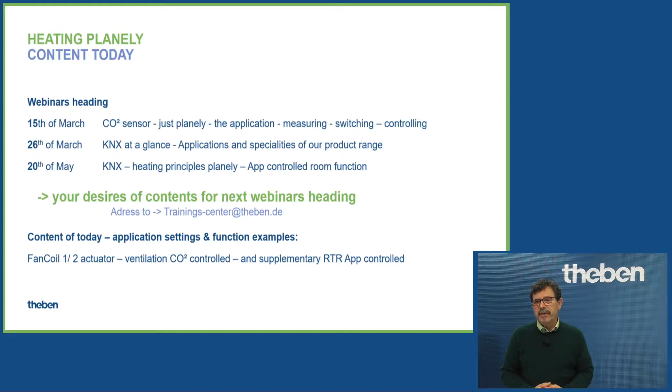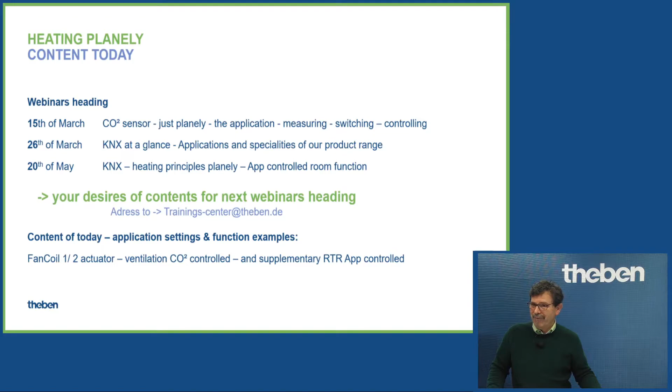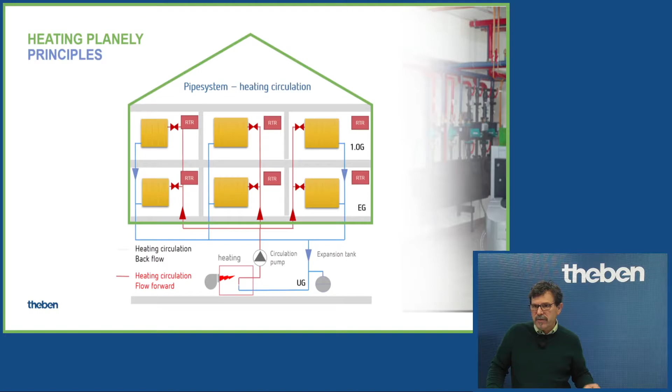Yes, so room temperature control, what has to be considered, what is, let's say, the principle, what are the basics. So just to give a really rough and a short overview. So this is a standard, let's say, heating principle system. So mostly used here in middle of Europe. In Far East, Australia and so on, the heating is not that much required, probably in some specific areas, but mostly then covered with fan coil units, so heating and cooling, for instance. But this is just a principle.

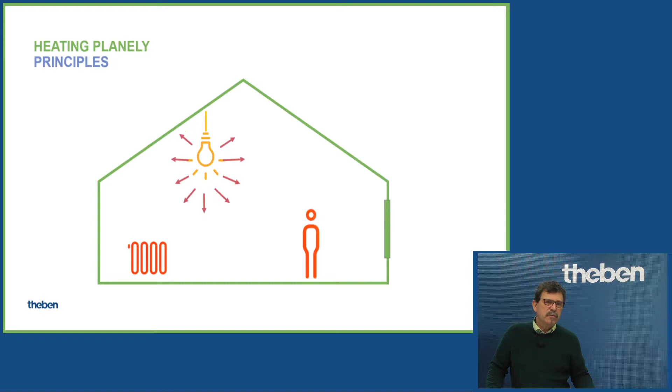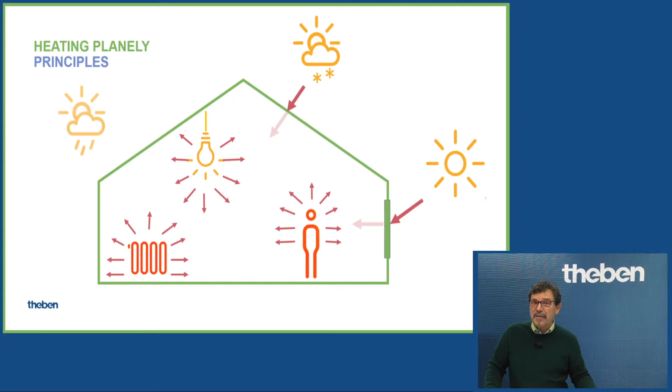But more of interest finally is how many impacts basically we do have inside of a room. So we do have here impacts of, for instance, any kind of lights which are absorbing any kind of warmth. We do have thermal radiation of heating systems, sure. We have thermal radiation of people inside of a room, and as more people are inside, we get more warmth in the room. So approximately 100 watts per hour is emitted from a human being with, let's say, standard working. If you do hard work, then probably you're giving 200, 300, 400 watts of heating energy into the room.

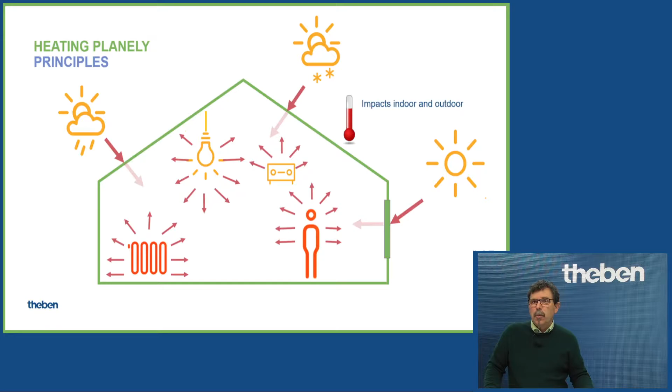And we do have some impacts from the ambient situation. So that means the weather and all these things, and technical equipment as well, which affects finally the temperature measuring. So this is a control principle finally, the RTR, the room temperature controller. So this controller is measuring what is the current temperature and gives a certain value to a valve. Depends on if we are talking about a continuous valve, or a valve which just is able to give us an I/O command to open and to close the valve, for instance, in the warm water system. And we do affect finally the radiator, so we open the radiator or we close the radiator.

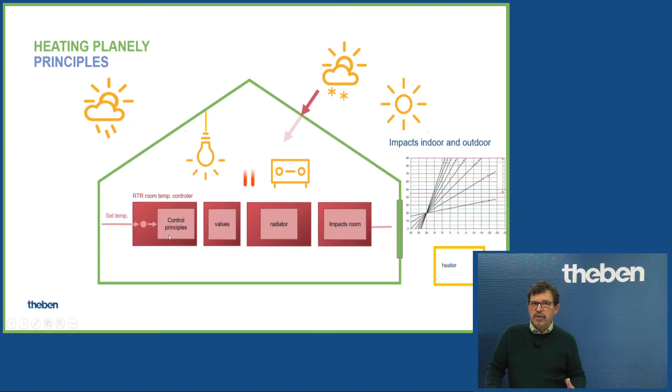And like mentioned, we do have some impacts in the room, which has a certain impact on the measured temperature. And this is, let's say, a cycle which permanently runs. So that means permanently the RTR measures how the current situation is affected by some external stuff, and finally this control value, which is sent to the valve, to the radiator, permanently adapts to the requirements.

And if you have really smart actuators, nevertheless if we talk about DIN rail or flush-mounted actuators, for instance, and if they are really as powerful as the Theben actuators are, they can give you the highest actuating value, and with this highest actuating value, we can adjust fully automatically the heating curve of an intelligent heating system without your input, without modifying anything.

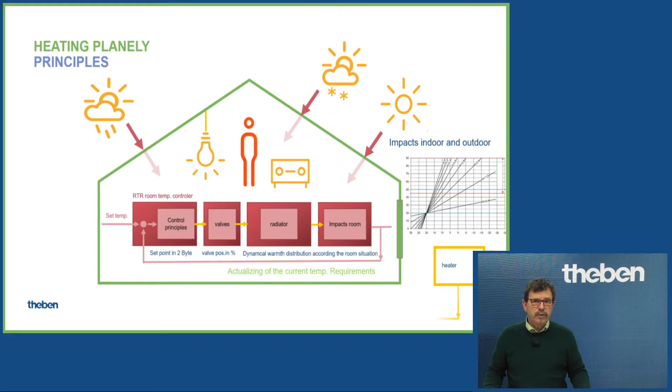So this is an automatism which runs on its own. But you need powerful actuators, which we do have. And finally, in products, it looks like that. Just as an example, we have here a room temperature controller, the iON series, for instance. We have here a motor-driven valve, which gives us a continuous response and opens, in this case, the radiator according to a specific value, so 20%, 25%, whatever is desired.

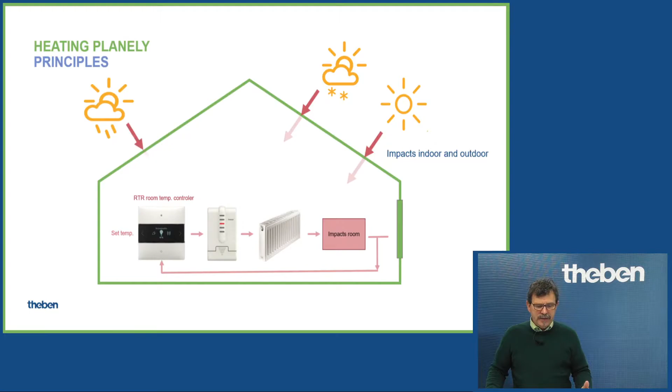And then again, the impacts, and this circle runs like that. So just to give this control function finally a face. And this is just what you need to know. And a second thing I'd like to make you acquainted with is the hydraulic adjustment. For which purpose do we need that?

Probably you discovered somewhere in your projects that one of these radiators in one room is warmer, and the other one on the other side is not that warm, but the control command to the valve is the same. And mostly this is a mistake of the hydraulic adjustment. This has to be done by the heating specialist, and it ensures that the water flow inside the heating or cooling system is identical.

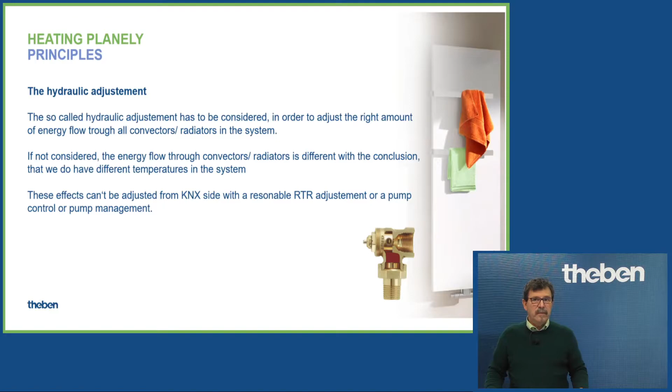So if one radiator is warmer and the other one is colder, you can't adjust that with KNX. No single controller in the world can support you in this case. Here, the heating specialist has to do this hydraulic adjustment for the heating and cooling. So let's have a look into the solution.

When we talk about heating, I just scratch a little bit. I haven't prepared any project or example, because this is another webinar which we are planning approximately in April or May, and then we concentrate especially on such kinds of solutions. So we have these heating actuators controlling two-stage valves, so thermal valves, not adjustable. And we have, for instance, here a temperature controller, the RTR, the iON. The iON is this controller here, which I currently hold in the camera. It is a room temperature controller and a monitor.

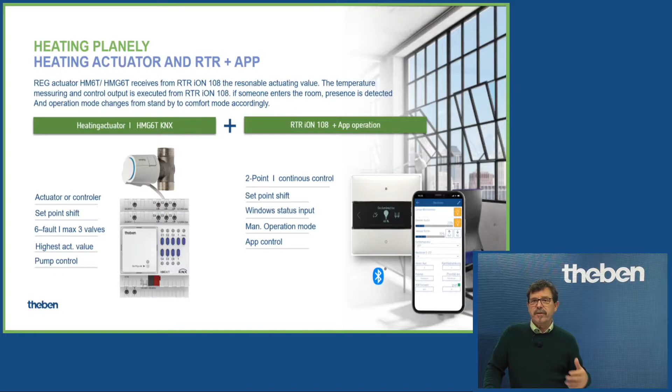And as you can see here, we have, as the first company as far as I know, the option to synchronize the Theben app, the iON app, with this room temperature controller, so you have a remote for the controller and can adjust or call up any kind of function with the Theben app. You will see this live at the end of this webinar, how to synchronize and what you can do. It's a nice tool and runs fully automated.

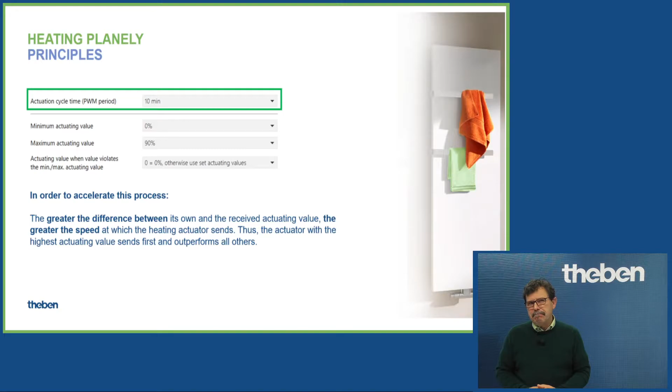Some heating principles, just touching on them a little. You definitely discovered in one application or another this PWM period, and there is a time behind it. So what does it mean, what is the effect? For this PWM control I prepared an example. If you have adjusted 10 minutes, we have this time frame of 10 minutes, and the room temperature controller measures the room temperature and, to reach a specific room temperature, requires 20% heating value. That means of these 10 minutes, the valve is open for 2 minutes, gives warmth into the room and then stops. Depending on whether the temperature is dropping or increasing, this time frame varies.

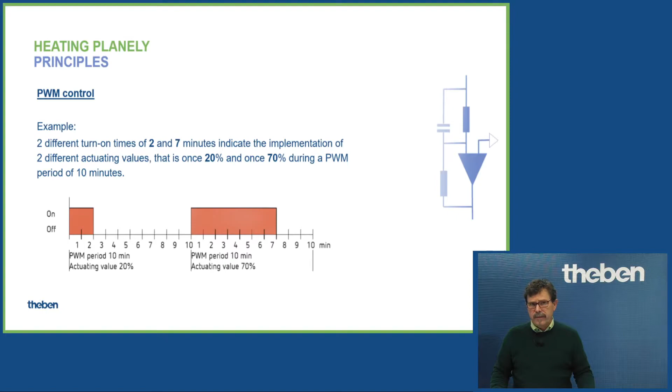So what does it mean if you extend this time frame of 10 minutes to, for instance, 2 hours? From 2 hours, 20% is 24 minutes, so we have a longer period. A longer time frame is ideal for underfloor heating, warm water underfloor heating. Why? Because this heating source is slow, so you need a longer time frame to adjust, calibrate, and control. 10 or 15 minutes is ideal for radiators. So just to make you acquainted with how it works.

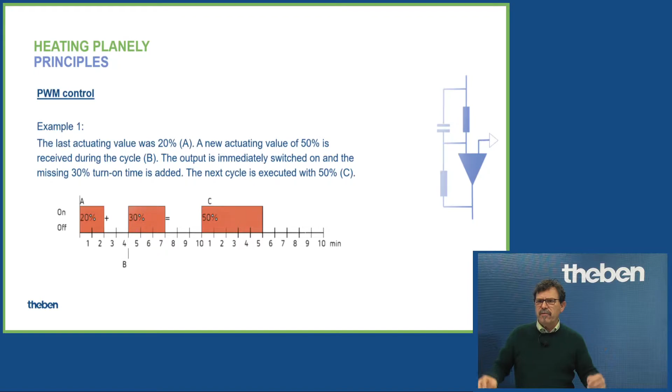And if you discover some differences, this is a kind of calculation module. After a while, we discovered we need 20%, then the temperature is dropping, we need 30%, and next time, with a certain internal calculation, we open for 50%, so we get rather fast back to our temperature. You don't have to do that yourself.

This is an automatism running in the background, in the software of this room temperature controller. So what is basically required?

Basically required is, frankly speaking, just one control command: the heating actuating value from the iON, the room temperature controller in our case. You have to address this value to the heating actuator, which is adjusted in this case to a continuous control, like here. So due to that, we give a percentage value, a byte value.

If you have adjusted it instead to switching, that's a typical heating principle for hysteresis control. Hysteresis control is just on/off, nothing in between. Continuous control means step open, a further step open, stop, step close, stop - there are positions in between in percentage.

And to bring these to run, it's really rather simple. You just have to connect these two group addresses, and that's it. All the other things are probably just of interest.

So as a feedback of the current value, for instance, or a feedback of the set point value. For which purpose? The purpose of these settings is to visualize. So if you have a visualization, for instance on your mobile, then you can read how the current situation is.

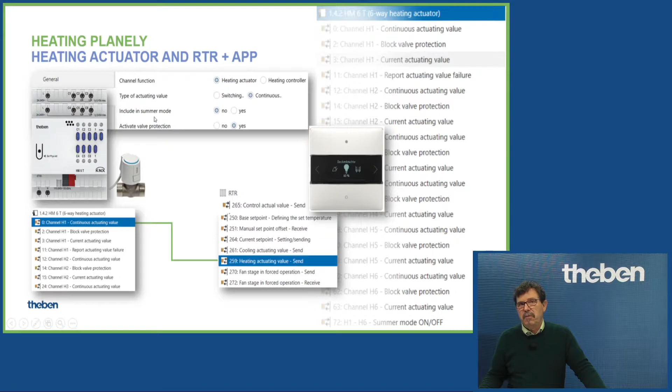Important to know or consider finally - from time to time I get a hint from my colleagues in the telephone hotline technical support: one of these triacs inside is destroyed due to overload, and we had a phone call to the client. So what is the reason? What happens is he hasn't used our valves and isn't considering the inrushes.

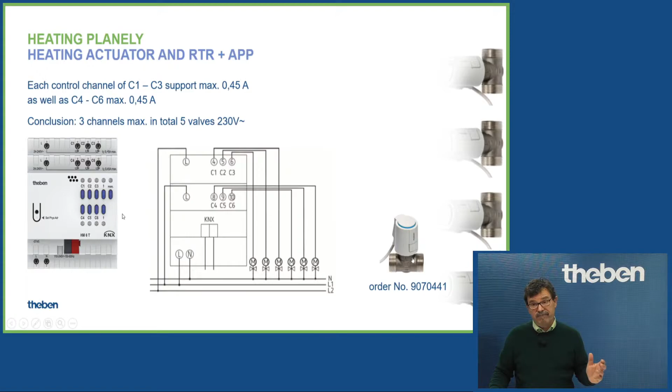Due to that, we have to consider that 3 of these channels maximum can be linked to 5 valves with 230 volt. Please be careful - even a simple thermal valve has a certain inrush at the beginning, for a couple of 4 or 5 seconds, and after that everything is fine, but this first inrush is highly stressing on the inside of the triac, and this can be, for instance, the end of a heating channel.

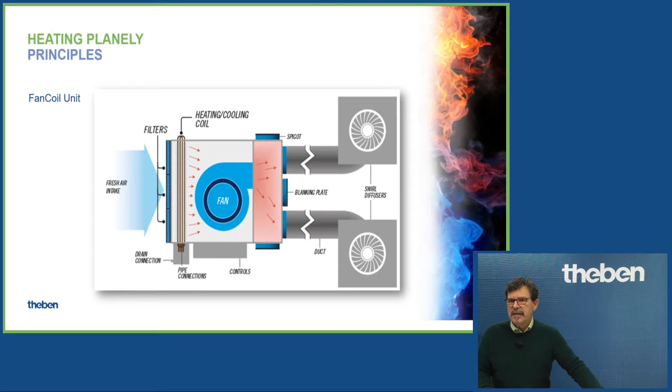So back to our main topic of today: fan coil control - heating, cooling and ventilation, which is highly interesting from the application side, especially for hotel applications, for industrial purposes, offices, buildings, municipalities and so on, wherever a certain degree of technical equipment is available or integrated in the building. And this has to be controlled finally.

So the function in principle, we have here a fresh air filter. We are hoovering fresh air inside with a fan. It is blown through the tubes inside the different rooms and so on. These fans can be controlled either I/O, in stage, or stepless.

So we support stage and stepless control. With the FCA1 we can control 3 stages, and with the FCA2, one of our remarkable fan coil actuators, we get a 0 to 10 volt output to control fans or dampers stepless.

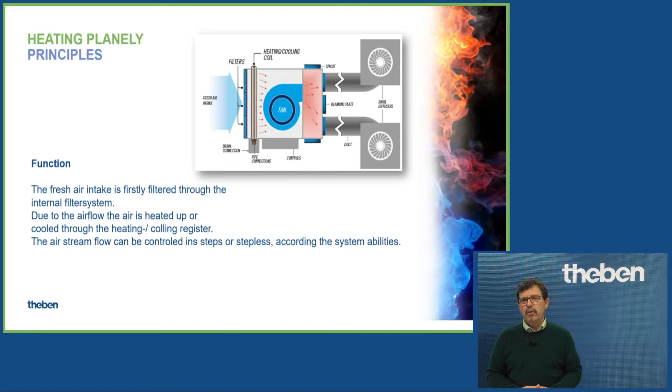Big advantage in this case: if you have noises through the airflow inside a room, say during a meeting, and feel disturbed by that noise, you can adjust the fan speed stepless to bring it down a bit. You can do this with an app on your mobile, or with a controller on the wall. With stepless solutions you have more ability, more flexibility, and it's more accurate.

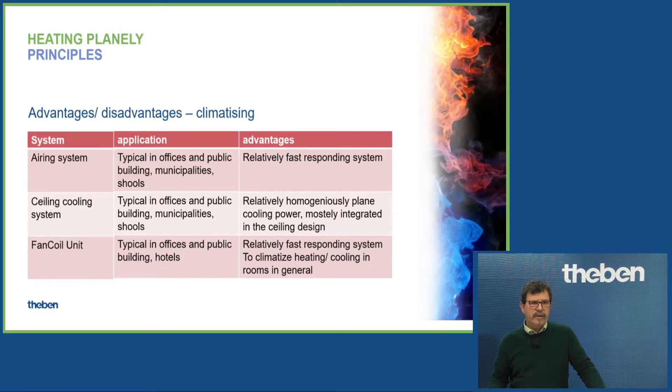So what is the advantage of such a fan coil actuator? A fan coil actuator gives you heating if required, cooling if required, and ventilation, to bring in warm air or cold air, or to do the air exchange according to CO2, for instance.

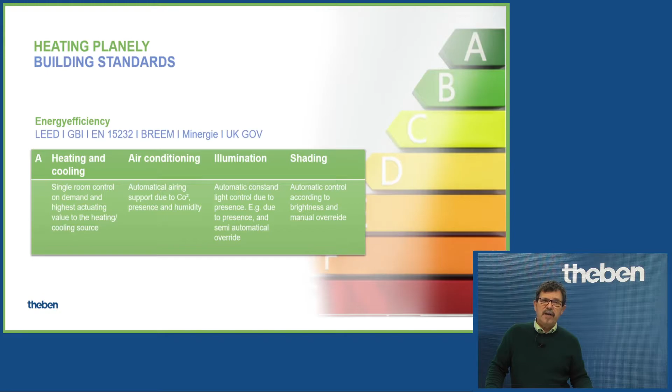Energy efficiency describes that, especially when we talk about heating or climatization, in the highest degree we need a single room control on demand, giving us the highest actuating value. That means we give the heating or climate system the highest actuating value to control it in the best way.

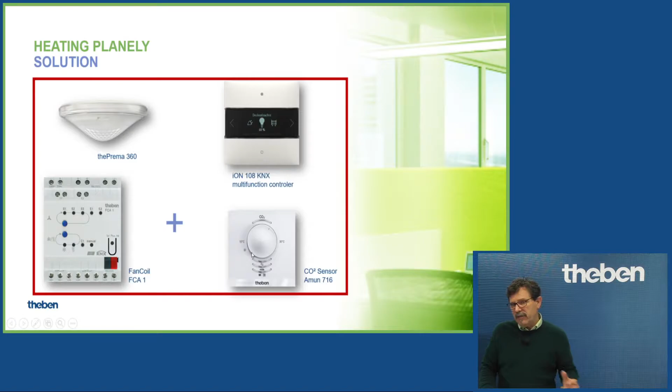In my project I have specifically used the iON 108 to manually override my desired room temperature. We have here the FCA — in my case the FCA2 — and I have integrated a CO2 sensor which cares about the air quality in the room, in order to do air exchange if required.

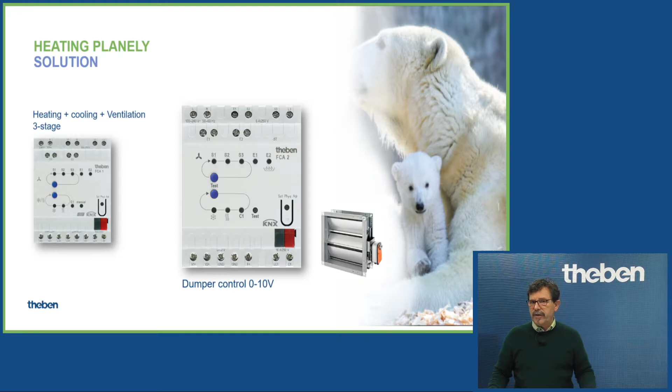This damper control I mentioned means we can open these kinds of air curtains in a reasonable way, or just by 3 stages, as you discover here.

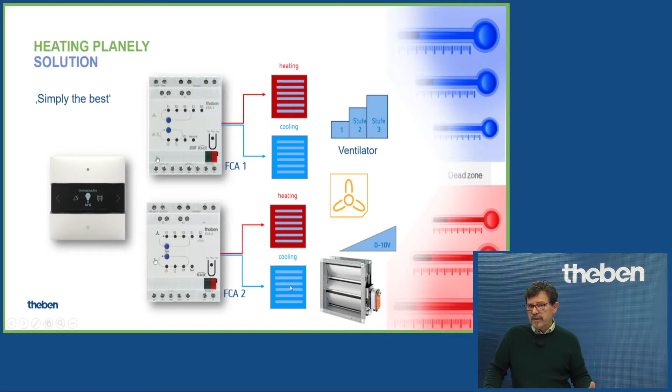From the appearance, the housing is the same, and most of the hardware inside is the same. The difference is finally the output. We have 3 outputs for the 3 stages, and we have the 0 to 10 volt output to control, for instance, dampers or thermal valves controlled by 0 to 10 volt.

What we have to consider, especially before we start the setup, is a certain touch point — the heating or climatization system, heating and cooling. We need to know if this system is based on a 2-pipe system.

2-pipe system, you discover here. The heating liquid or cooling liquid flows through the same pipe. So the warm water flows in, comes out, and goes back to the heating source. If we need cooling, we definitely need a delay time, and then externally a valve opens and brings in, in this 2-pipe system, the cold liquid, in order to cool down this air conditioned system, and the flow back is here as well.

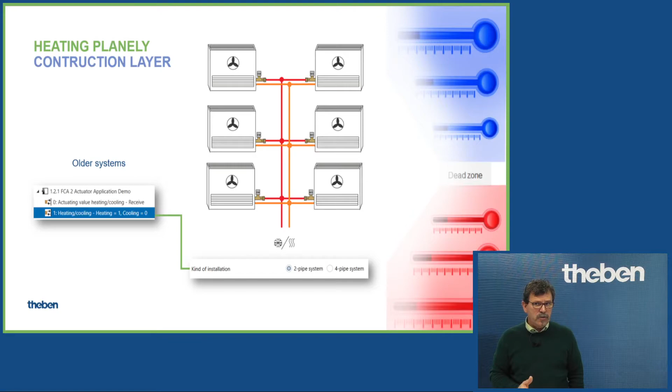This is intensive — you have to care about this, because this is the preset you have to do, and according to that you get the reasonable communication objects on the ETS side.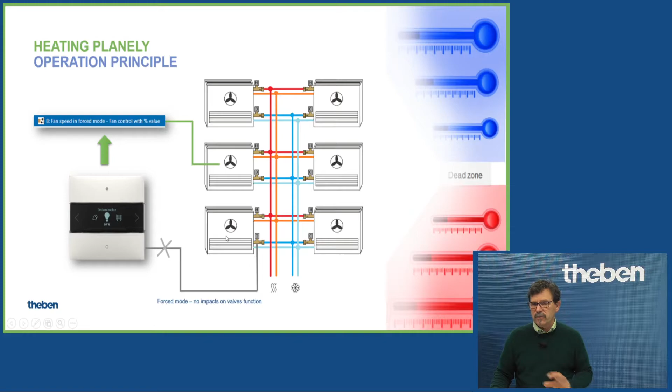We have here as well the airing control, but in a forced mode — say we have a conference, many people are in, and we set fan speed to 100%. However, this does not affect any kind of control in the cooling or heating pipe system. It's just controlling that one — there is no relation between each other. And back again to the valves.

I think it makes sense to have just a glance on that, because this hardware - if the hardware does not work properly, then don't expect that the result at the end of the day is quite fine. So due to that, you need to have these simple basics.

Thermal valves for the FCA1, you just have to apply on the FCA actuator. That's it. Don't forget the hydraulic adjustment. If something is going wrong, one room is warmer and the other room is colder, but the warm source is equivalent, so have a look on the hydraulic adjustment. This exists as well in heating and cooling systems.

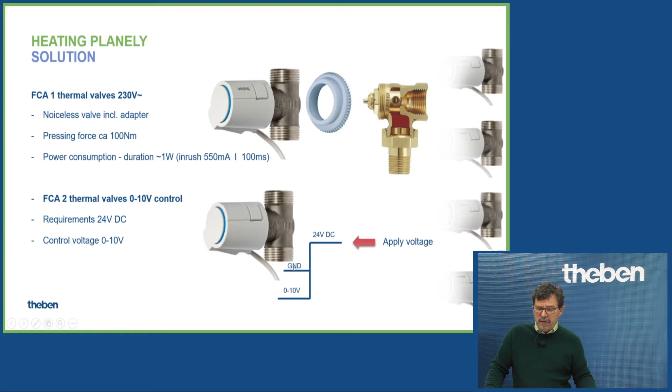When we go for 0 to 10 volt control, this control is a little bit different from the approach of the wiring. In this case, we have to apply 24 volt DC to this valve, and we have 3 wires. Then we need to apply the ground and the 0 to 10 volt to the output of the FCA2.

So we have here V1, V2, we have here the ground, and this valve for the heating, this valve for the cooling has to be applied once here and ground. This one here and ground, and that's it.

According to the temperature control command coming from, for instance, the iON, we get the reasonable value, and these 0 to 10 volt valves open or close in stages. So this valve is able to stop at a certain degree, to open at a certain degree, to close. The other one, the simple thermal valve, is just able to open or close, that's it.

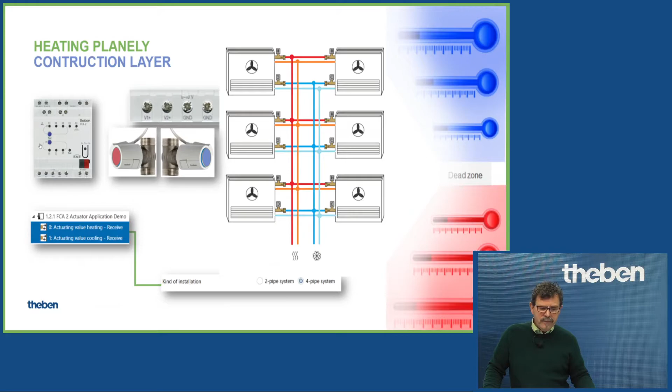So this is hardware, and it's important to know, because if this does not work again, then don't expect too much at the end of the street. Let's come to the topic now. We do have here the FCA as a fan coil actuator.

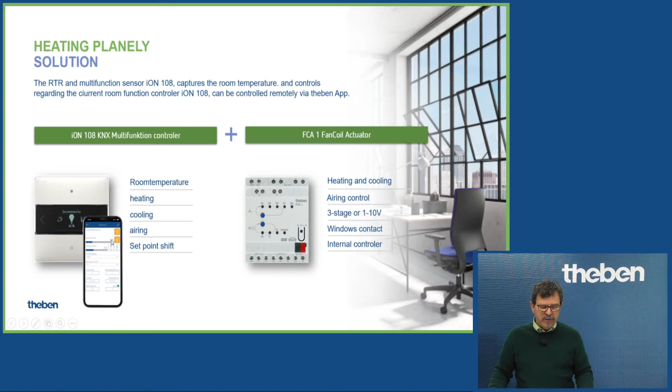We do have here the room temperature, what has finally to be considered. In my case, in this application for hotels, municipalities, schools, however, I have adjusted heating and cooling. I want to have this heating and cooling support, especially in these hopefully nice summer days which we are heading, so we need cooling as well.

Due to that, if we adjust to heating and cooling, so we get here as well the actuating value for the heating separate and the actuating value for the cooling separate, and this has to be supported.

So what is required? From the iON 108, as an example in our case, we have to adjust in an application setting as well. We need this iON for the heating and for the cooling, and if done, the actuator, this room temperature controller, is sending the actuating value, and this has just to be linked to the fan coil actuator, and the cooling actuating value has to be linked as well to the cooling of the FCA. That's, let's say, the minimum what has to be done, and then the system is almost running.

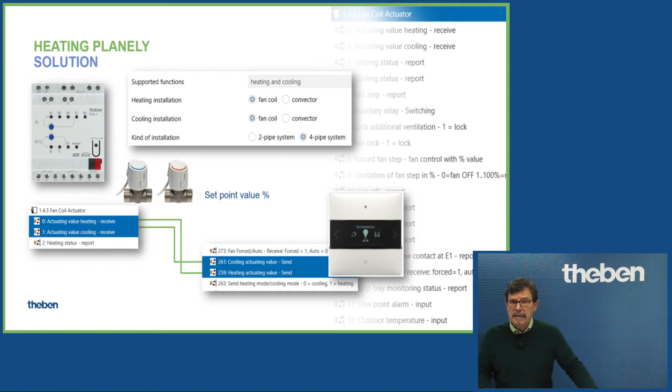It's not that big a deal. All the other things on top are probably nice to know or required when it comes to ventilation and so on. When we talk about ventilation, these are stage 1, stage 2, stage 3, in stages or in percent. So it's a matter of the setting.

Later on I will open the ETS and show some application settings. This has to be finally activated. So you can do, for instance, this manual mode, forced mode, or automatic mode.

Forced mode means with the iON you force the fan to do a rather fast airing into the room in order to prepare a meeting, so that we have a good air condition or air quality inside of the room, or after a meeting, however. So then full speed, and we can do that, or we leave it in automatic mode, so it's finally up to you. This can be done, this does not have to be done, it's not mandatory.

Fan stage forced operation means this has to be linked if you want any time to override, so that you, as user of the meeting room or the guest in a hotel, for instance, want to operate manually - you can do the airing on your own, you can adjust however you like it. So this is finally a matter of how comfortable the system or the project is set up finally.

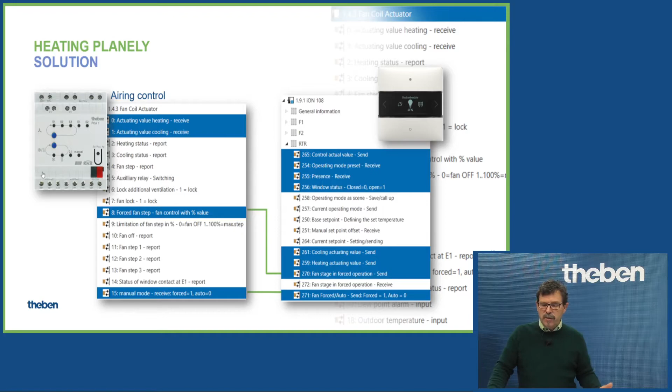The control actual value is just for display. If you are eager to see it, for instance, on your mobile, you need these communication objects linked to your visualization. Window contact, here you see, this has to be linked. We have the window contact from the actuator, and the window contact as an info to the iON. So the iON displays a symbol, which you can choose, showing the window is currently open, as a kind of feedback of the system.

The window contact, by the way, has to be applied here. We have in the E1 these two terminals. This has to be applied, for instance, to an I/O contact, and if the contact is open, we send a status, and the display pops up, window open or such.

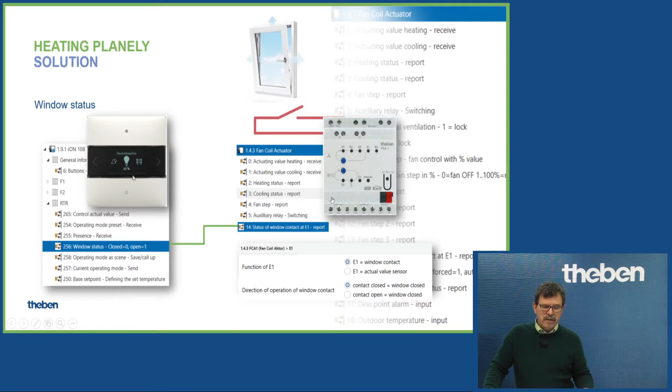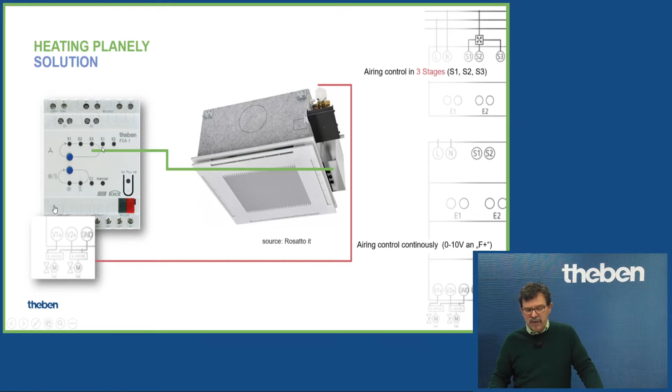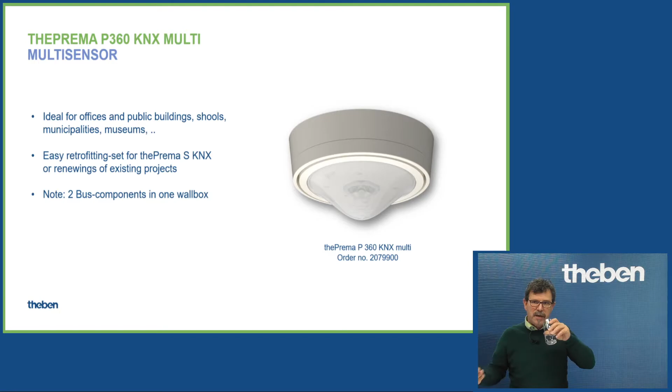When it comes to presence-dependent control, in general we use a presence sensor. This is a specific webinar we are holding in the next couple of weeks, specifically with this multi-sensor. You can put all in one, not a separate CO2 sensor and a separate presence sensor. Our multi-sensor has it all: room temperature, CO2 value, and the presence function, and these can be integrated in the heating and cooling system in a school, a municipality, and so on.

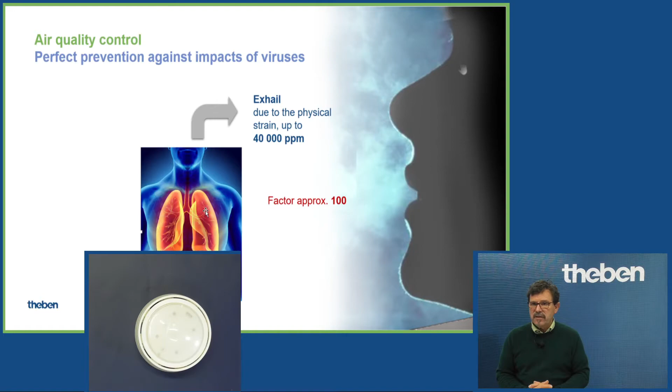Why do I start now with air quality? Because air quality is currently of high interest. It's really in focus, and we have touch points almost daily, because airing is required. Without technical solutions like automatic ventilation, you have to do it manually to bring down the CO2 value in a room. The CO2 is related to the viruses we are fighting against: the higher the CO2 value in the room, the higher the risk of getting infected if somebody is in the room. So good ventilation is mandatory.

Just to give you a figure: if you breathe fresh air, we talk about roughly 400 ppm you are breathing in. But exhaling can be up to a maximum of 40,000 ppm. I measured it a few times myself; during normal work it comes to around 10,000 ppm, but if you are working quite hard, the exhaled carbon dioxide can increase up to a maximum of about 40,000 ppm.

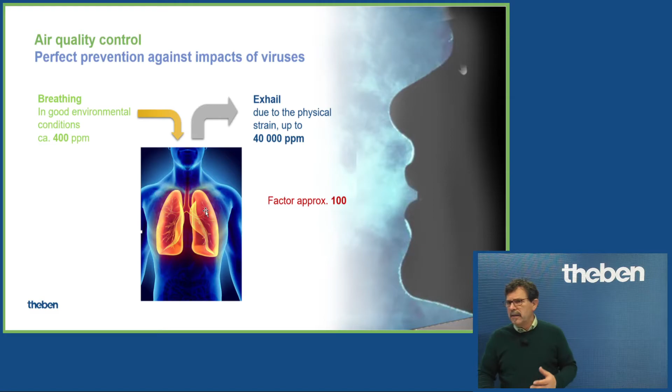ppm stands for parts per million. It's like lux for brightness. So that means there is a reasonable factor in between. And as well, the CO2 sensor is measuring the humidity. And the humidity as well has a certain impact on, let's say, transportation and effects with this virus.

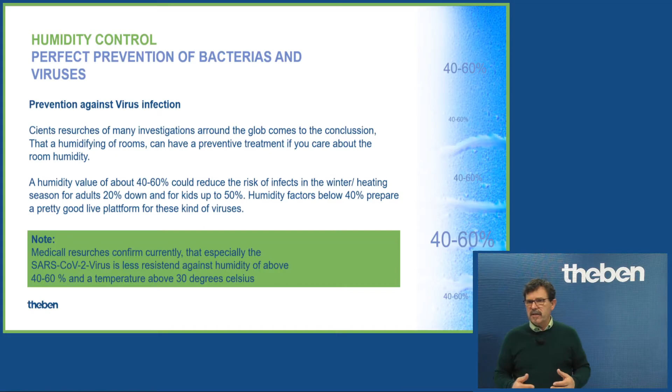Medical researchers, for instance, confirm currently that especially this specific virus is less resistant if the humidity is above 40 to 60% and the temperature is above 30 degrees. So that means if you have a good room climate, it's a good protection to prevent, worst case, being affected by this current virus.

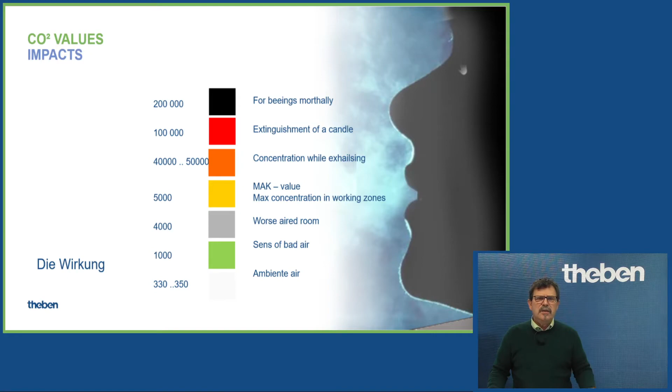Just to give you here a reasonable value so that you can appraise: what is 40,000 ppm, for instance, or what is 4,000 ppm? A natural good air quality is around 400, 500, something like that. Around 1000 ppm, if you are a really sensitive person, you feel the air is not that fresh anymore.

When it comes to 5000 ppm, this is from European normative regulations, the maximum concentration in working areas, in working zones. This one is the concentration while exhaling, and 100,000 ppm means the extinguishment of a candle on its own. So when we have 100,000 ppm, a candle is extinguishing on its own.

You know, the people 150 years before, going down in the ground, digging coal or gold, they had a candle, and when the candle went down, they knew exactly the CO2 concentration is too high, so we have to get away to avoid that we will finally die.

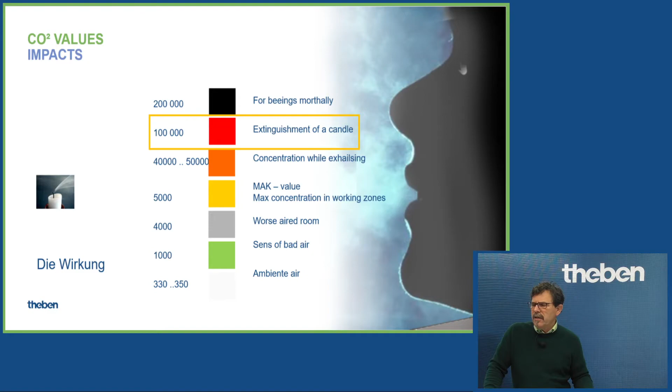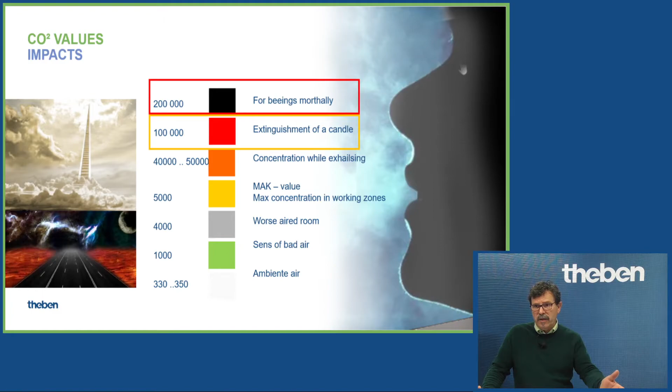And between 100,000 and 200,000, it depends, it is mortal for human beings. So at that stage, it's a matter of your life, highway to hell or stairway to heaven, I don't know. But then definitely it's mortal.

With the FCA2, we have another option as well, but this is really highly sophisticated, especially for the warmer areas in the Far East, in the Middle East, where we need air conditioning much more than here in the middle of Europe. We need the external temperature, and with this external temperature we can do a parallel shift of the indoor temperature control. As it becomes warmer outside, the inside temperature increases automatically as well.

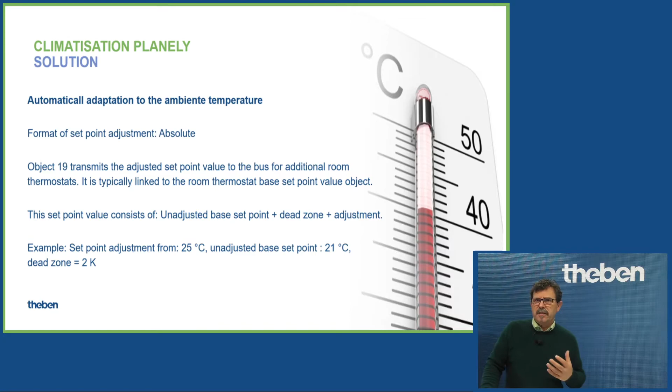This can be adjusted, so that when you leave your office or the municipality or the schoolroom, the difference from inside to outside is not that big, so that your body can adapt and handle it. For instance, we have here a 2K shift. If we start at 25 degrees and the outdoor temperature increases by 1K, the indoor temperature increases by 1K as well. So the set temperature will automatically adapt to the outside temperature.

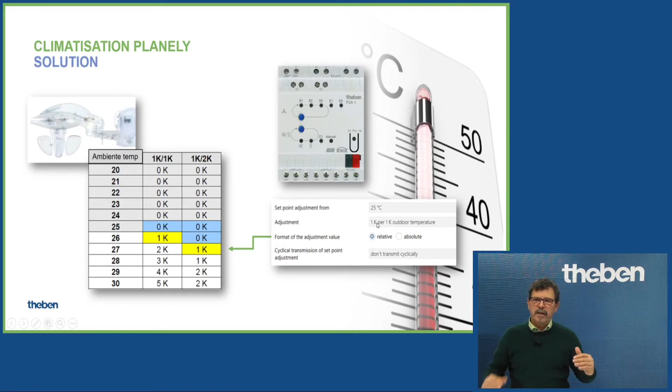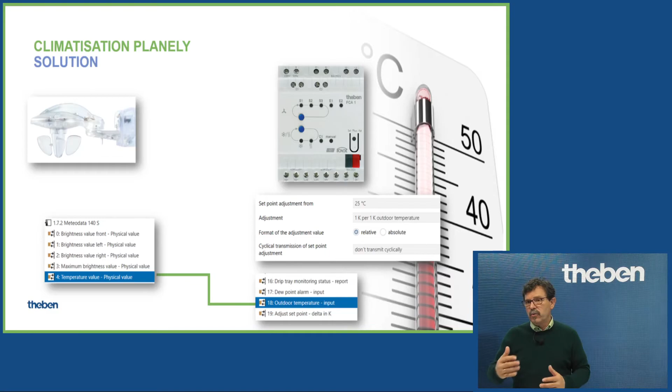I think it's quite an interesting function, quite simple. You just have to link a temperature probe from the outside, which gives the physical value of the ambient temperature, to the indoor temperature from the FCA1 or FCA2. The application is widely the same for FCA1 and FCA2. Then the automatism runs on its own. You can adjust from which temperature this adaptation shall start, and the degree of adaptation, 1K, 2K or 3K, whatever is required.

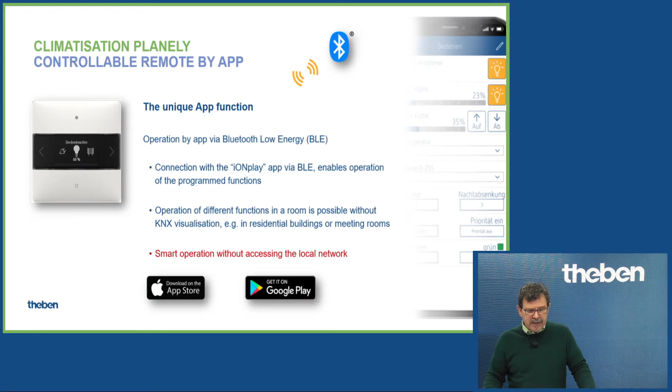Yeah, this we skip at the moment. And then I think it could be of interest to have a look in the ETS, because time is running. I got a hint from my colleague: don't talk too much.

So I have here the FCA2, and you see I've activated heating and cooling, and I receive these two separate communication objects. If I just want heating, for instance, then I have just that communication object. I leave it in heating and cooling because heating and cooling is required, especially in spots around the globe needing heating and cooling in prestigious projects.

And here is the important thing which has to be set: 2-pipe or 4-pipe. Please do it before you start with the setup. If you discover later on, after setup, oh shit, sorry, the physical hardware on site is not a 4-pipe, it is a 2-pipe, then you start from scratch.

So first of all, have a look on that. What is the physical touch point from your system, FCA control, to the heating and the cooling system, and then start with the setup. Then we can do, for instance, here adjust remote controller. So that means you require a temperature controller, like in our case the iON 108, or you use an internal controller. And in this case, we need a temperature probe.

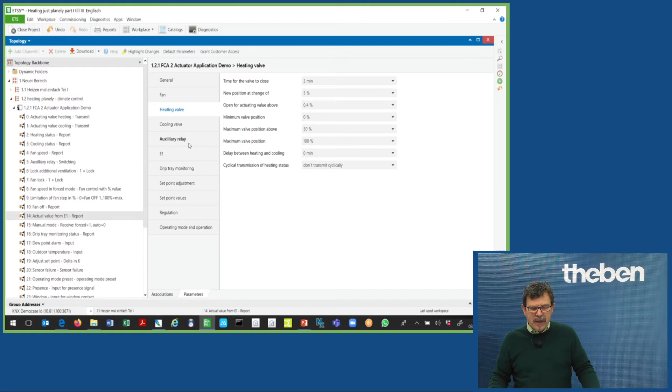And I want to mention as well, we do have inside of the fan coil actuator a so-called auxiliary relay for an additional heating support or for other things like that. So if you want, you can use it, for instance, for a second stage of the heating; however, you can adjust it however you like.

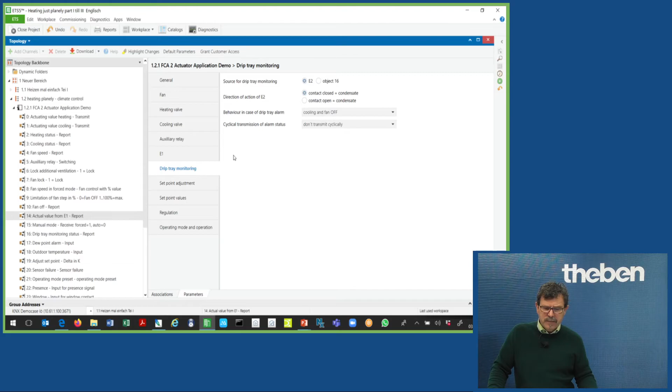Drip tray in fan coil systems is always required. If you have 2 sources, heating and cooling, there's a temperature difference, and this finally causes condensation in the drip tray. And there is a liquid level, and if the liquid level in the system exceeds a certain level, then we can finally give a command. So please care about that, just to make you aware.

So this is exactly the setting which I mentioned 2 minutes before, this automatic adaptation to the external temperature. Here you set from which point it shall start. And here you can adjust, for instance, in which steps, in which degree, in K, it changes. Okay, thanks for the hint. Okay, great. So that means we do have here the different operation principles, and we can adjust here as well.

So what is finally the mode in the FCA 2? Which point we shall reach, and especially when it comes to presence-dependent control. What we want to have: just a presence controller, so that means a presence sensor, or we want to do it by a key card in a hotel, or with a switch, or a push button. So just a short insight on that.

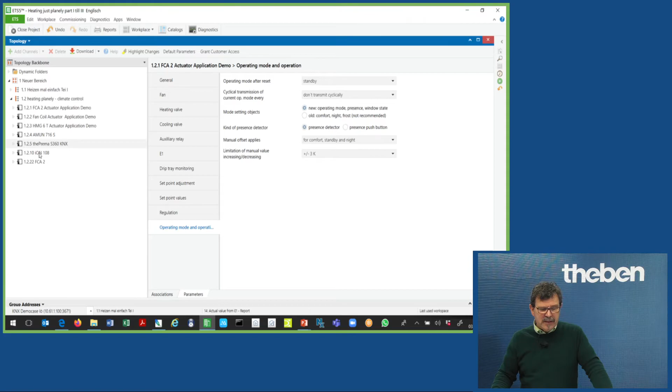This is what has to be considered, and I just open here as the last point the parameters of the RTR. So I have here the RTR settings. I have adjusted heating and cooling, so that's the reason why I get here the heating and cooling support. I want to activate the fan stages. You have to do it manually in the application setting, otherwise you do not get the communication objects supported.

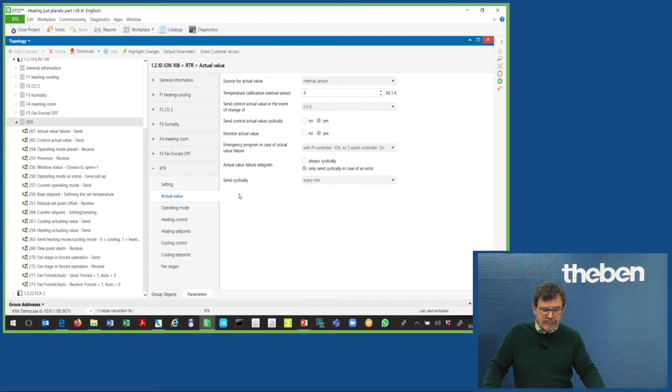I've chosen here the internal sensor, which is inbuilt in the controller, and if required I can do some adaptation. But I want to make you aware, we have in our factory a climatized room where all our temperature controllers are calibrated, but if required, you can adjust on your own however you like.

Operating mode, so how long it shall last, for instance, you can adjust here for conferences or whatever. The heating control: here you have to define specifically if you want to have support of cooling, of continuous control, so that means you send a percentage value or byte values, or 2-point I/O.

So this is mandatory to preset in advance. And heating set points, here you can limit. I think this could be of interest, especially when it comes to projects, public buildings, schools, and so on. You can modify the temperature, for instance, but not from the lower level to the maximum level. So I come in, I put it to 26, my colleague comes in, puts it down to 20, the next comes in, puts it down to 16.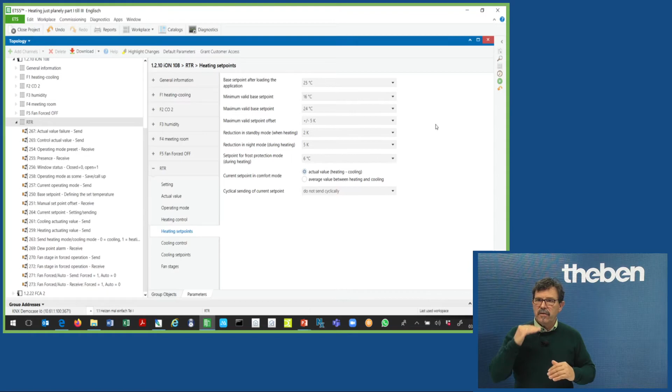So you can physically limit it, for instance, the maximum value. For instance, you give the permission, maximum 24 is the upper limit. You can press on the push button, okay, but it doesn't affect anything. And the minimum is, for instance, lowest 16 degrees, and that's it. So then you can do whatever you like, but in the background, in the software, it is adjusted where the limits are. Cooling control, same stuff, depends on the system.

The cooling points, you have here definitively to adjust the so-called dead zone between the heating and the cooling if you have a fully automated system. It's not recommended, for instance, to set 21 degrees and exactly on 21 degrees the cooling system starts. Then the two systems, heating and cooling, are permanently working against each other. It's not really efficient. So I will definitively recommend a minimum of about 2K. It depends on the room, on the insulation in such a room. But don't put it too low; take a value around 2K, then it's fine.

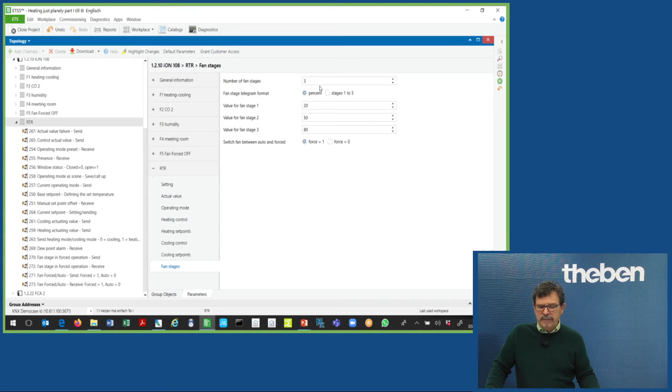Fan stages, you can limit if you want. You have just one stage or probably more stages, and you can adjust the value here. You remember I have put it to a percentage value, so we send a percentage value to the fan, and whatever the ability of the fan control system in a fan coil actuator is, you can adjust here accordingly, and you set the thresholds in percent, so at which stage it shall operate.

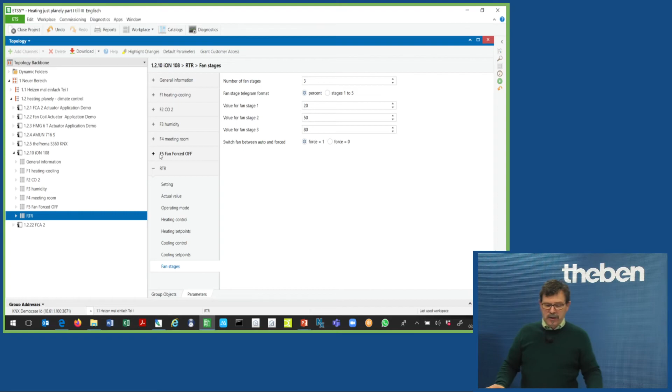And then I'd like to ask my colleague from the control panel to give me the view to our small demonstration. I have talked a lot, but I hope this background is essential and important for you. I want to share some insights with you. And for that purpose, I now link my mobile to the system as well. So I have my mobile here on my table. Thank you so much. And you discover here the Theben iONplay app.

So I now do the operation directly on the control panel. You know how it works: up, down, fan stage, and so on. You can operate manually. And if you press for a longer time, I get the actual value. So the room temperature here in our video studio is 22.5 degrees. And now I'd like to synchronize my mobile to exactly this product here, the iON 108.

What you have to do: you need a mobile supporting Bluetooth communication. You download the app for free from the Play Store or the App Store, and just press here on the plus. The app sends a query to the surroundings, which product is in the reception area. We discovered here the iON 108. You just confirm with the check mark and press OK. And then the preset project in the iON 108 gets mirrored.

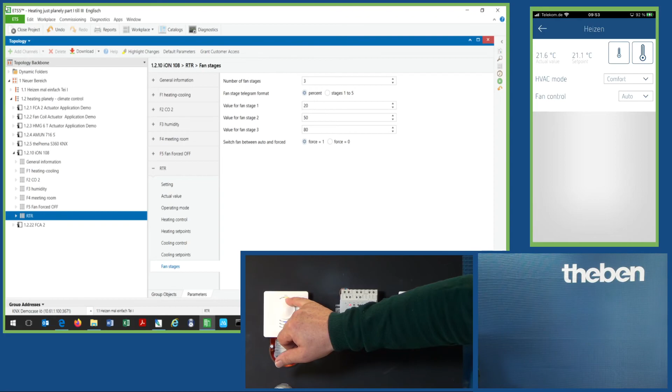So now I give just a certain CO2 on the sensor. So that means I have exhaled extremely. And after a short moment, this green light of the CO2 sensor has turned now to red, affecting now the fan stage here, which has been started to stage 1.

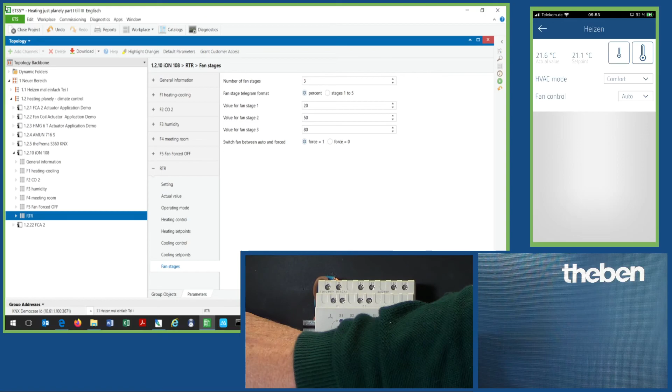Now the CO2 is measuring again, so it is increasing, because this measuring stage takes a while. It's a slow process. Then we have stage 2 and now maximum stage, because the red light of the CO2 sensor gives me now the indication. So we are overshooting, exceeding the preset values, and this is an automatism.

So that means the more people are in the room, the more the CO2 value is rising. As well, we do have here the blue LED, which gives me feedback as well, that the humidity is quite high. So if I go now here, the ppm is currently 5,000 ppm. So under this condition, for instance, the humidity takes a while.

Then we have here the option to override, in my case, for instance, the fan coil. We can deactivate heating and cooling, for instance, here at that stage. And if I go back to this automatic mode, we currently have stage 3. Probably I want to have stage 1. You see immediately we have now the manual override, and we move down the fan speed to position 1 manually. So we do the override.

If I put it down to automatic mode, after a while it controls again and finally comes back to stage 3. It takes a while. Nevertheless, HVAC mode, anytime I can change to standby mode, or go to eco mode. Anytime I can override manually and have full access to the system.